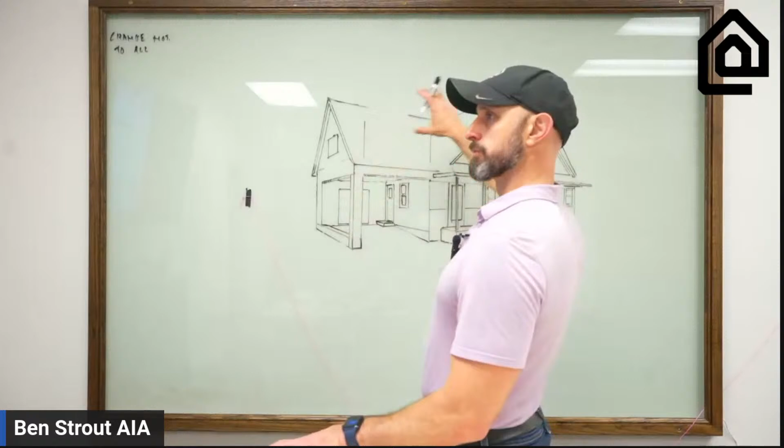Design for a house here in Alabama. Right now the house as it sits is a single story house. So this part is existing, and we're adding basically this roof structure, some windows, some gables, some dormers.

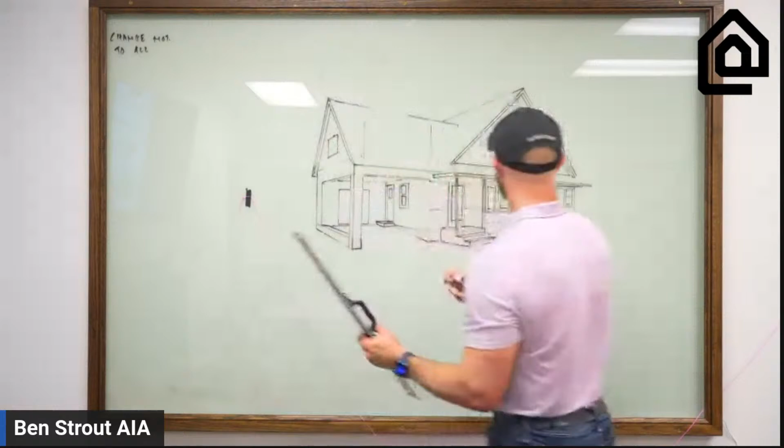Awesome, thank you, man, I appreciate it. Yeah, we have a lot of fun doing what we get to do. And I am going to do some kind of perspective drawings.

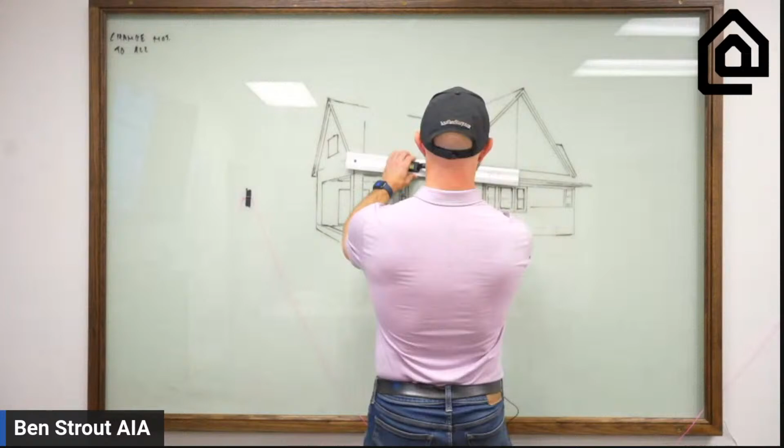Let's go, Edmonton, go. There you go. We got a little bet going in the background here. I don't even know who's playing. I grew up in the Northeast and had buddies that played hockey, and it hurt too bad. I played a couple times, and yeah, when you get hit, it just hurts. I'm just like, no, I don't want to do that. So yeah, hockey's a no for me, but I love how brave you have to be and tough. So more power to that, if you can handle it.

But okay, so again, my name is Ben Strout, I'm an architect. And well, actually, I started my life in construction. Why were carports built over garages? Why did they do that instead? I don't know, it pretty much could be a garage if you put a door on it. But I think cost, this was probably a pretty inexpensive build when it was built.

And it's funny because now it's like a 900 square foot house in a nice neighborhood. And that's actually one of the things that's so cool about the Another Story system, is that when you're working with a smaller footprint house, this really is a leverage point, especially if you're in a nicer neighborhood where you're able to.

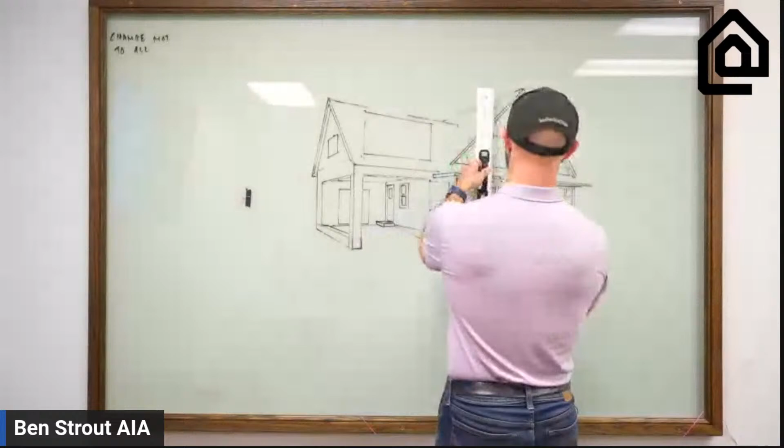Had it at the ready. Thank you, yep, Jeremy's my backup, he's my wingman. Are you going to pop in tonight? No, I need to stay in the background tonight, I'm bouncing between Joyce, bouncing up and down between naps. Gotcha, cool, no, that's great.

But yeah, so we're designing, and we've got some likes, some loves. If you have any questions about what we're doing, don't hesitate to jump in here.

What I would like to highlight about what I'm drawing and what we're doing, probably the most important thing, is the fact that our system, we have a proprietary system called the Another Story system, which enables you to add a second story.

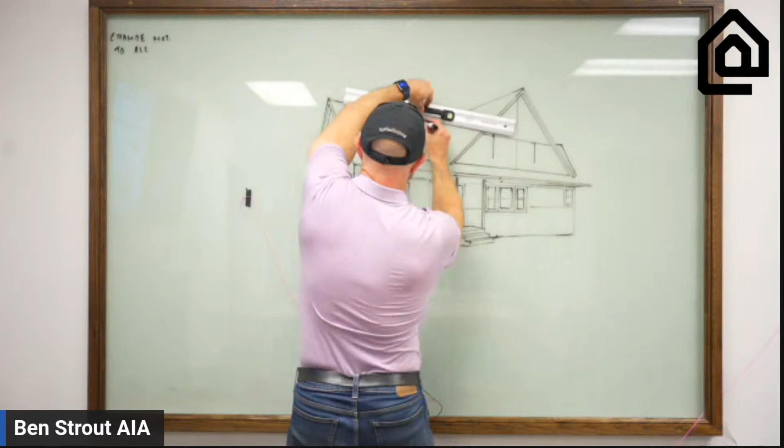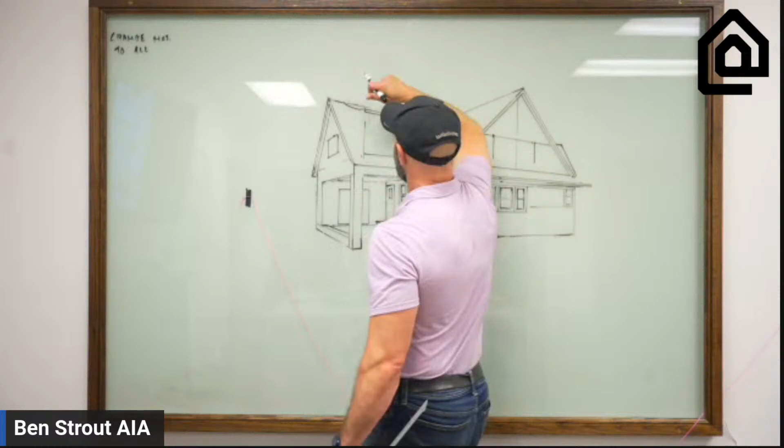Enables you to add a second story on your home while you live there, not displacing you, and keeps your house safe during the construction. A lot of people have considered adding additional space to their home. That would be great. But you've probably heard horror stories of people adding a second story, with water getting in or other damage to the main level that came from the process.

Can you do it on a trailer? No, not really. Would it be safe to assume the system would allow you to add a third story? No, it's not safe to assume. It can happen, but the problem with the third story isn't so much structural issues as it is zoning and city issues. It depends on where you are. Most of the time the city doesn't like buildings that get that tall, so that's a non-starter a lot of times. But we would love to still take a look at it.

Some of the workarounds for that is to do more like a story and a half, so you can still pop up the second story and then use the area underneath the new roof that you've made.

Can you add a story to a modular home? Yes, depends on the construction. We work all over the place. Our office is in Alabama, but we have contractors in Boston, in Florida, and in Utah, and we're adding more of them all the time.

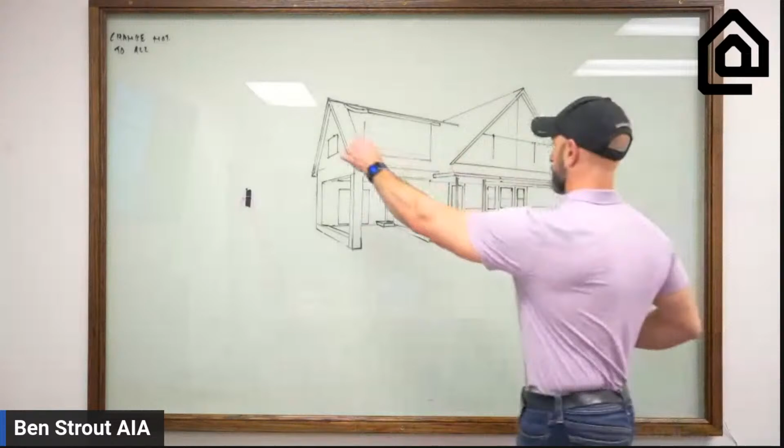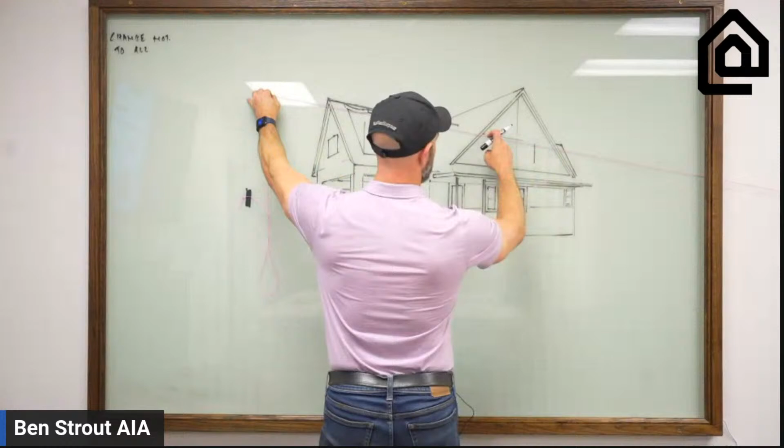So again, I'm Ben Strout, and why should you care what I have to say about adding space to your home? I'll tell you why: because I've done it the wrong way, several times. And once you see that you don't have to do it the wrong way, and that there's a better way to go about it, you just want to tell everybody about it.

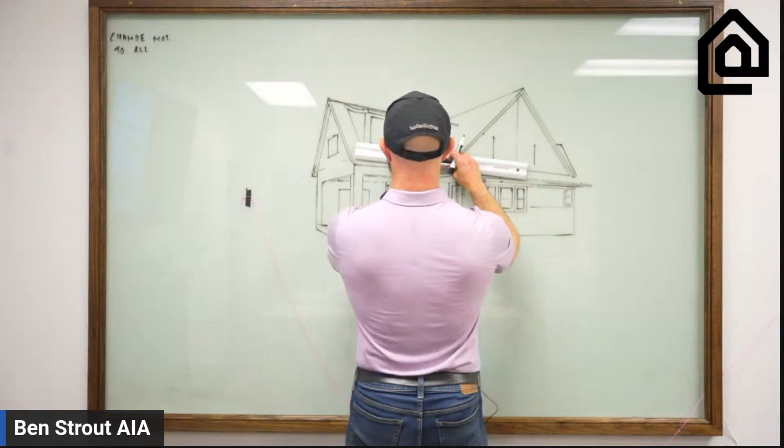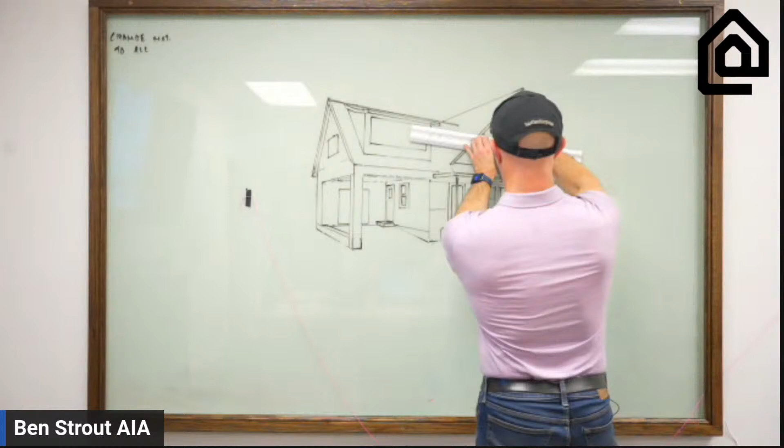Here's the deal: we get a lot of people who say, 'that doesn't work for me, I wanted a third story,' or 'I wanted to do it on a modular home and the construction isn't enough to hold it.' Well, guess what? You probably know somebody. If it's not you, it could be your cousin, your friend, your mom, your uncle, somebody that needs more space. And if they need more space and they're stuck because moving out isn't feasible, we can help them think about modular, as we have.

We'll always flush things out, and that's honestly... So Jeremy is one of the guys working with me, he's one of my business partners. I didn't realize he was commenting. Can you hear me? Yes, I can hear you now. No, I was saying flush out things, not flush things. We are, whoops, flesh. Yeah, okay, flush things out. Yeah, you can flush things too, like down the toilet. Now, I've flushed some of my designs for sure.

I think, what are you, a Zennial, or what's your generation? I don't know. '92. I feel like I'm 92. Oh yeah, so I don't know what you are. But anyways, they have different language in your generation that I don't always understand. Flushing it out, I said flush it out is what I meant. You said flesh it out. Let's make that very clear. You like to flush it out or flesh it out? Either way, you know what I mean, both ways. You get the point, I get the point.

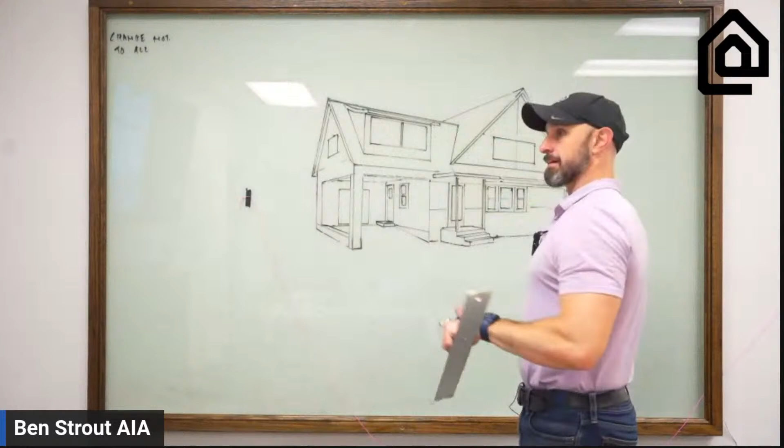I love it. Okay, so again, I feel redundant when I'm on here, but I feel like it's the best thing so that people can understand what it is that I'm talking about. We have invented a way to do this to your home.

If you live in a single-story home, in a nice neighborhood where the values of your home are great, and you wish you had more space but you're stuck because your house is too small, we can add a second story on your home while you live there. We'd love to do that for you.

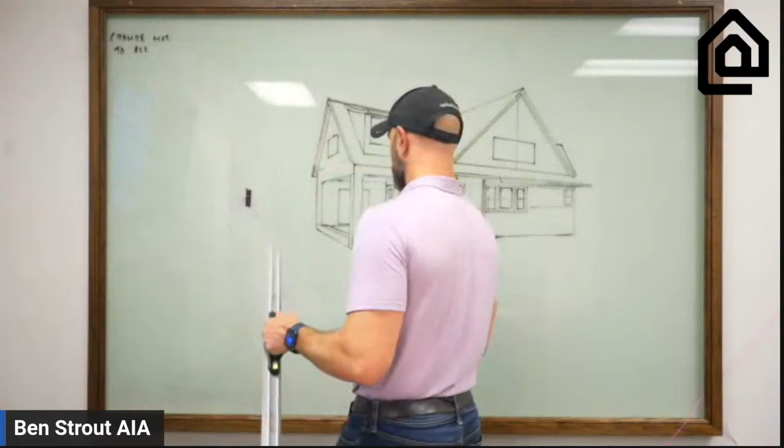I love these modular questions, man. These are freaking sweet. Yeah, no, this is great. I thought this would be a good time to come on here, I'm like, everybody's just kind of hanging out. Yeah, evening times are always the best, especially Sunday nights because everyone's great.

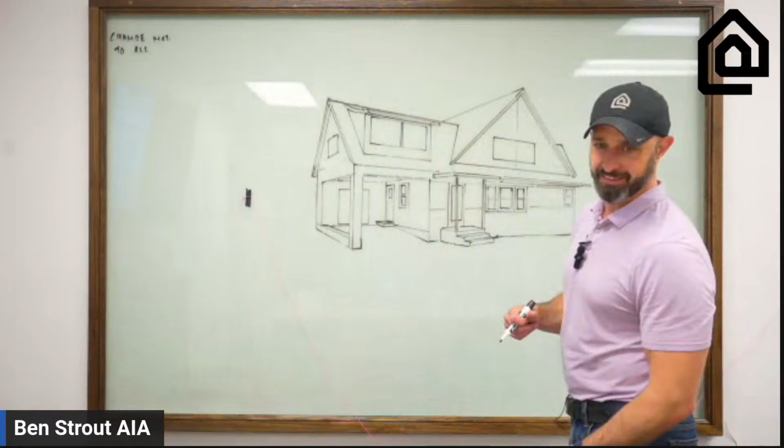Hey, Dopamine Designer, how you doing? Woohoo, what's going on? That's Natalia, right? That's awesome.

So I'm thinking with this one, we're actually going to do a little front porch across the front. I'm going to add some zhuzh to it, a little bit of character.

How did your move go, Natalia? Did you get moved? I saw where you were washing some carpets or something, looked like it was satisfying to get all the dirt out. I hate moving. Yes, do it, recommend it to her, keep recommending away. I love it, thank you so much for liking the movement. Well good, great. The last time I did a move, I was like, if I don't have to do this again, that'd be okay. I don't love moving.

So I take a conventional frame, so I take it you're going to conventional frame the roof. It is kind of like conventional frame. So we basically frame it backwards from what's typically done, in that we build the shell, the whole exterior shell, before we take the old roof off. And that keeps the house from...

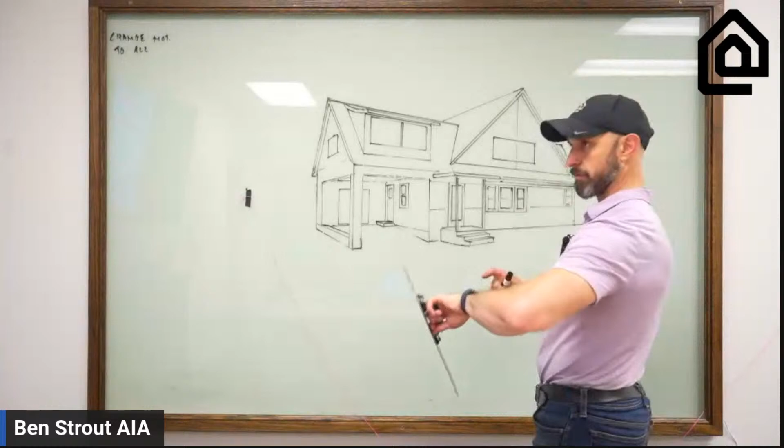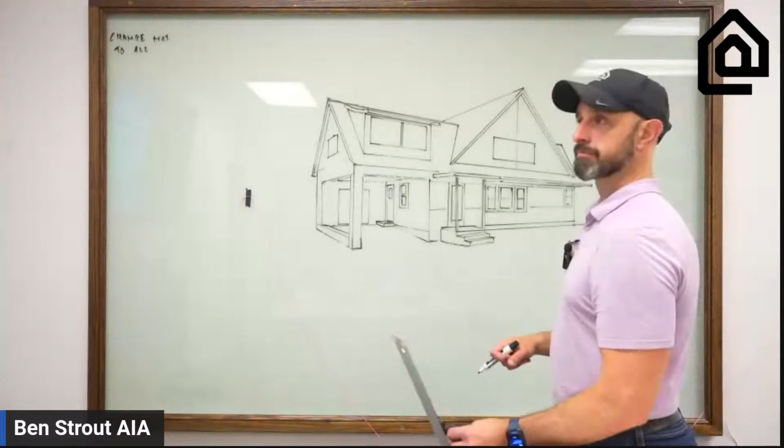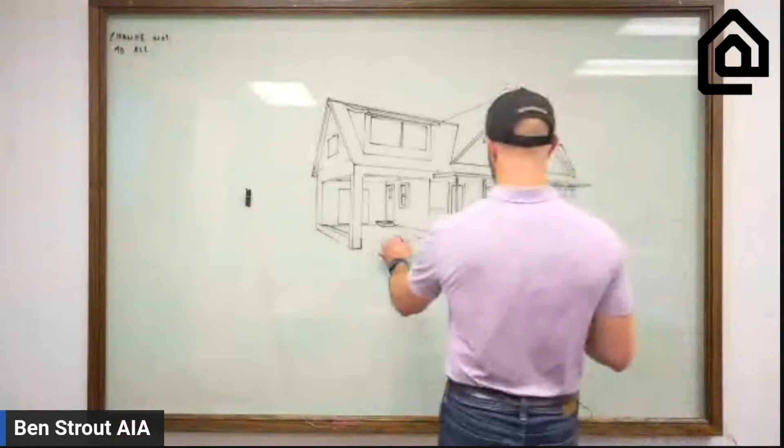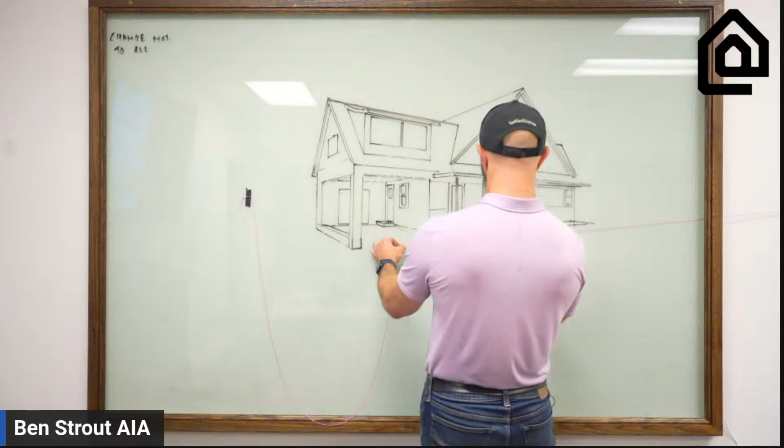So yeah, we're designing a second story on this home, and this home is in Alabama. The way we're going to do this one is actually like a shell out. The homeowner is fairly handy and he wants to build out the interior himself, so we'll be doing the shell for this one.

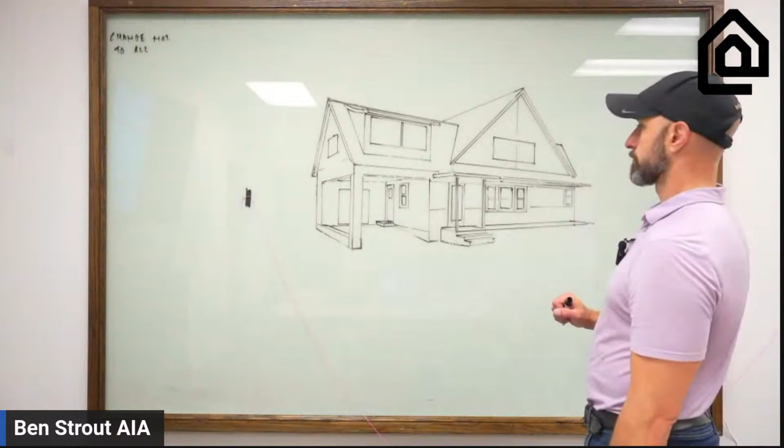Giving him the bones to be able to come back and infill the interior. So basically you're going to have a soffit over the carport. This is actually kind of poking out, it looks like it's not got a soffit, but it's sticking out. It just happens to be lining up.

You hear me? What's that? I said of all things to point out. No, I mean, it's a fine detail. But no man, dude, I'm telling you, here they come.

I need my room in a split level. We turned a 3-bedroom, 1-bath into a 6-bedroom, 2-bath without adding on. Oh cool, wow, that's crazy. So, big one.

My angles of depth are off. Yeah, they are a little bit. But it's a whiteboard sketch, and we're not going to build it. Yeah.

I swear, sometimes the comments are just the most entertaining. You're like, yeah, thanks genius, I appreciate that. No, I mean it's okay, it's fine. Oh guys, for those seeing this on other platforms, we have some troll comments happening over on TikTok.

Well, I mean, it's fine. Feedback is feedback. And I think also the way this thing looks on the screen is a little bit off too. But...

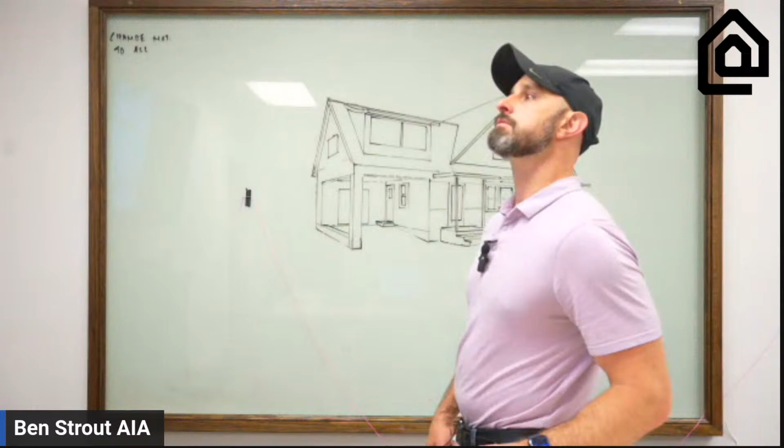Let's get more light on the gable ends. I can't tell what that means. Sabus, what does that mean? Mr. Bigelow, you should go live and show us what you can do.

Will a new second floor joist be needed? Yes. So we do a new floor system that sits above, with more glass. That could look good. We install a new floor system above the existing ceiling, so there's basically an air gap between the two. That way you don't have to touch any of the existing infrastructure. Windows or more character, yeah.

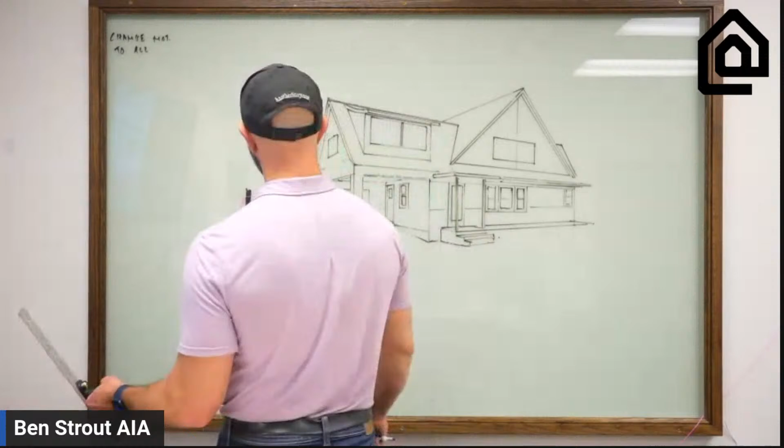How long does the process take on average? So the design part, Natalia, it ranges - it's a pretty broad range, but it'll range from 2 months to 5 months depending on the client. Really, we can get to a design pretty quick, but clients oftentimes go back and forth and have to see things 13 different ways.

I work for Truss Joist. Do you spec? We absolutely spec. I spec all day long. Send me your information and we can chat.

I don't know what Chester Copperpot means. Oh, Chester Copperpot, that was such a good movie. Did you get that reference? That's from the Goonies, Chester Copperpot. That was one of my favorites when I was a kid. Very nostalgic.

I think that pulled that line down. That's what's messing us up a little bit.

Okay, what's behind the back wall covered entryway? So this is a little carport that's on here. I'm thinking we might suggest that we wind up doing - it's a garage and we might close it in. I don't know yet.

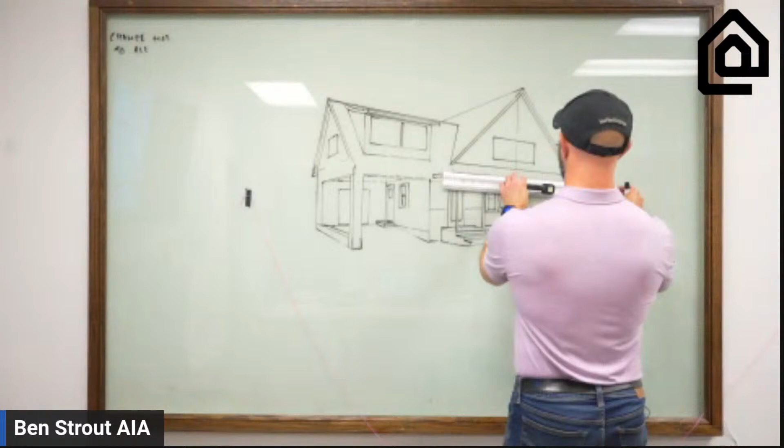I don't know how many of you do this kind of live stuff - you realize you do these little weird vocal tics. It drives me crazy when I listen back to myself. I have this thing where I hold my breath in between things I say. I'm like, why do I keep doing that? It's driving me insane, it's like a muffler sputtering. Oh, it's so annoying, I'm so annoying.

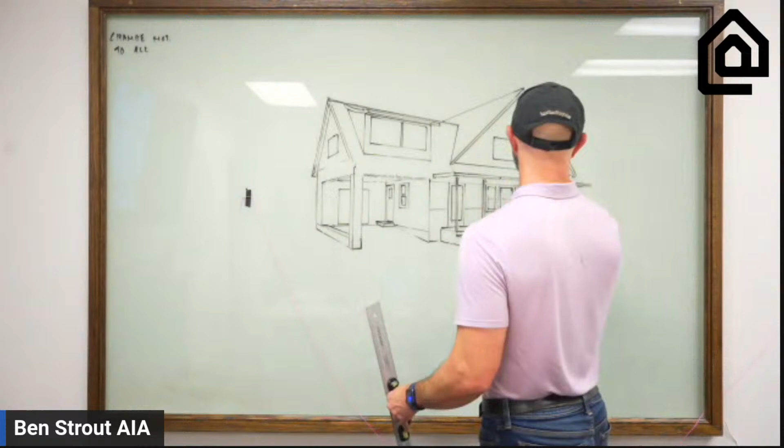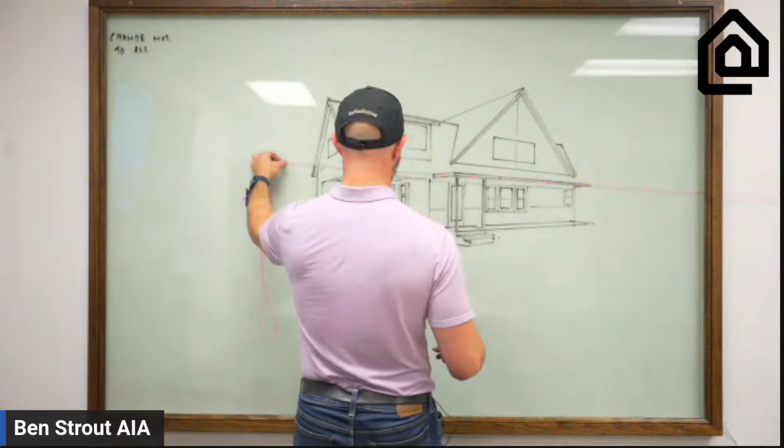Oh man, that's all good, dude. I say too much - well, it's normal, but the little grunts, I'm like, what am I grunting at? Hey, I make old man noises when I sit up. I just don't know that I'm holding my breath is what it is. I'll be like, oh yeah, I haven't taken a breath in a while, I should breathe - that's a good thing to do, if you're into that kind of thing. Yeah, it's important a little bit. It does have value, there's some value to it.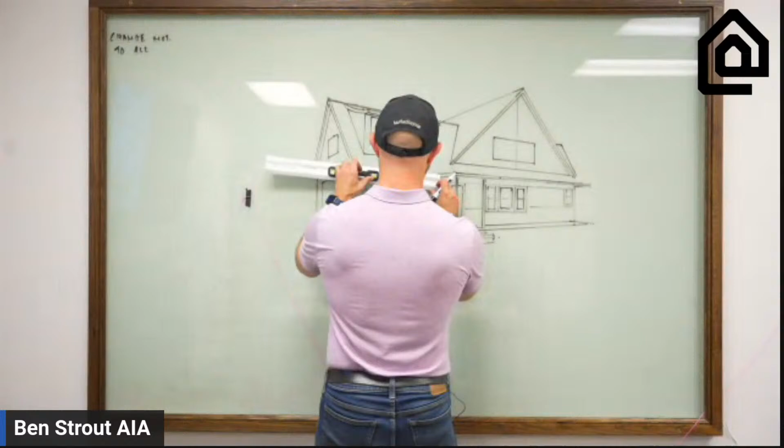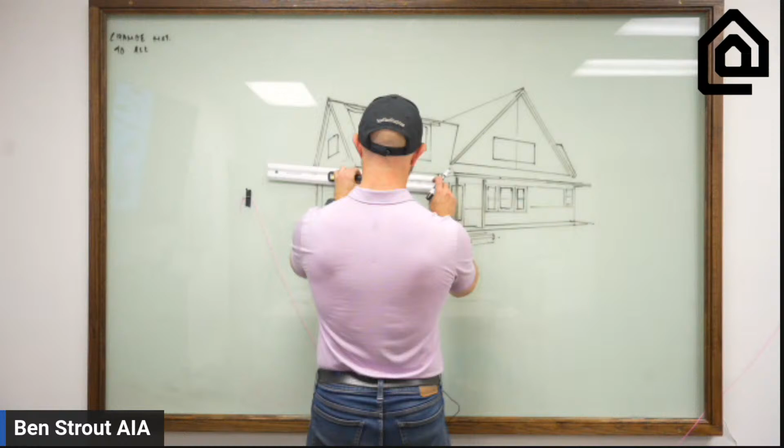Okay, so back to what it is we do and why we do it. Again, my name is Ben Strout. Why should you care what I have to say or what I'm drawing or what we are doing? I happen to be an architect, a contractor, a home builder and GC, and started my life as a carpenter. Really, at the heart and soul of who I am, I'm an inventor. And so we invented a way to add a second story on your home without you having to move out. And that's what you're watching me do right now.

These are just some sketches. This is not at all to scale, really - not at all. I mean, it's kind of to scale. This is not really true to form of what this is going to be. This is really for me to have fun talking.

Ants? What's that? What is this? A center for ants? Center for ants. This is 100% a center for ants.

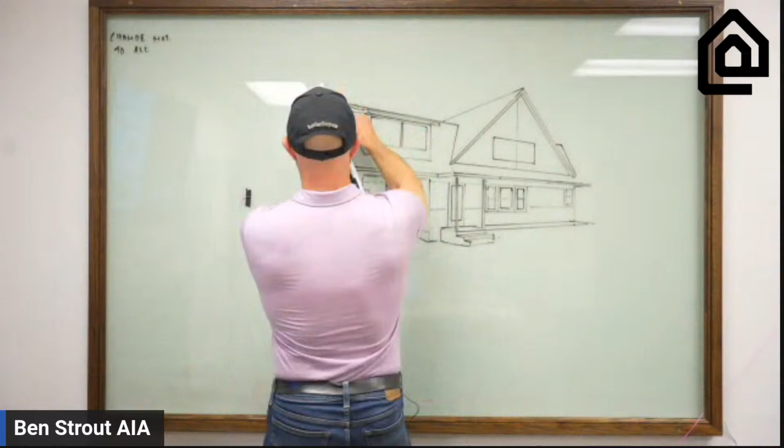Yeah, we couldn't fit more than 1 or 2 kids in there total. But so yeah, we invented a way to add a second story on your home while you live there without displacing you or your family. Maybe this isn't for you, maybe you don't need a second story, but I bet you know somebody who does.

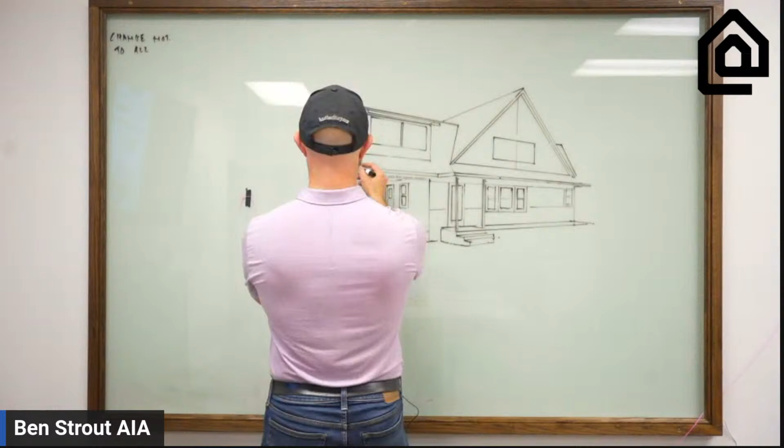And I bet you'd be their hero if you called them and said, hey, you know how you guys are on top of each other and you're probably going to murder one of your children? Oh, I can't say that. Probably going to, yes.

Exactly, sister ceiling joist. That's exactly what we do. Well, no, so we will sometimes sister to trusses, but ceiling joists usually no. We sit up above the ceiling joist so that we don't touch any of the existing infrastructure and don't have to mess with it. Otherwise, you lose a lot of the actual space.

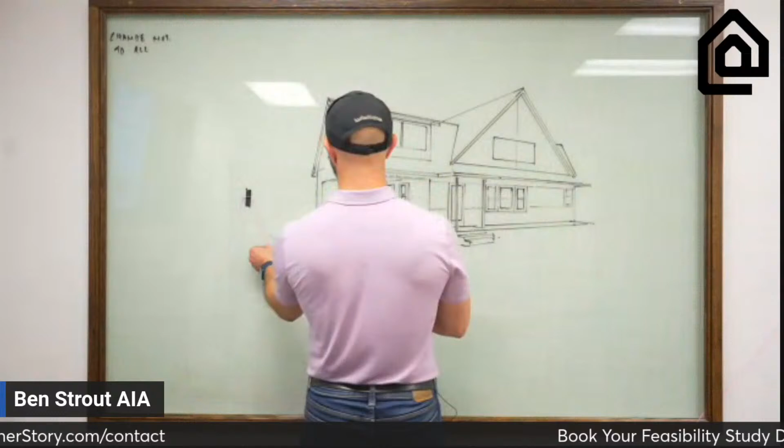That's the trick, that's the question. Chester Copperpot's hitting on something big. That's the trick. So, little backstory: we did it the wrong way the first time.

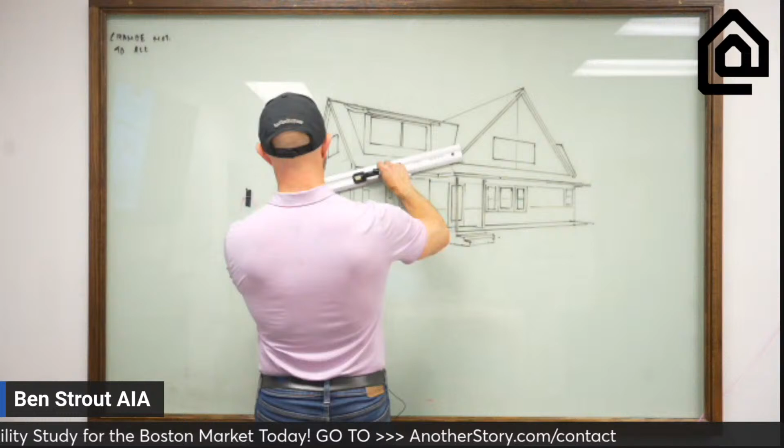So in 2012, what feels like another lifetime ago, we took the roof off of a house, tried to frame it back as fast as possible, and lost everything on the main level of the house. It wound up costing us right about $100,000 to fix the mess up, and that was 2012 money—all I had at the time and then some. We did get reimbursed from insurance eventually, but it was not enough to have saved our company. We wound up having to do all of that out of pocket, and it sucked. I would never recommend that.

Yeah, exactly, this mama needs space, I'm telling you.

Okay, so we've done some really cool designs around split level designs. I've got a couple in my pocket, I've drawn them a couple times. No one has moved forward with one yet, so you could be our first. Go into the link in the bio and sign up for a free consultation—we'd love to talk to you about your house.

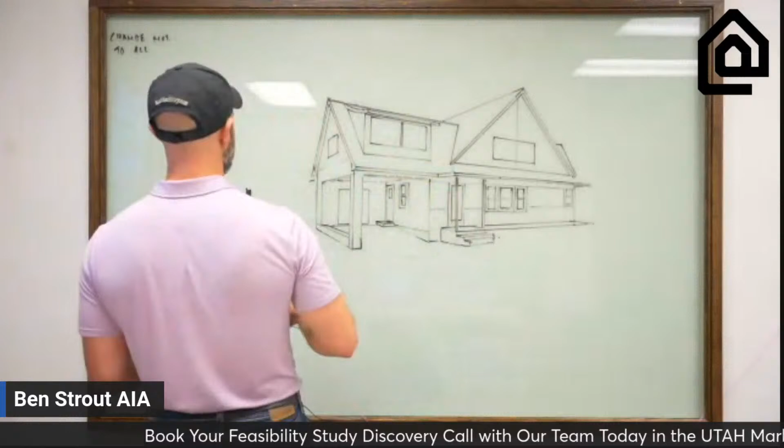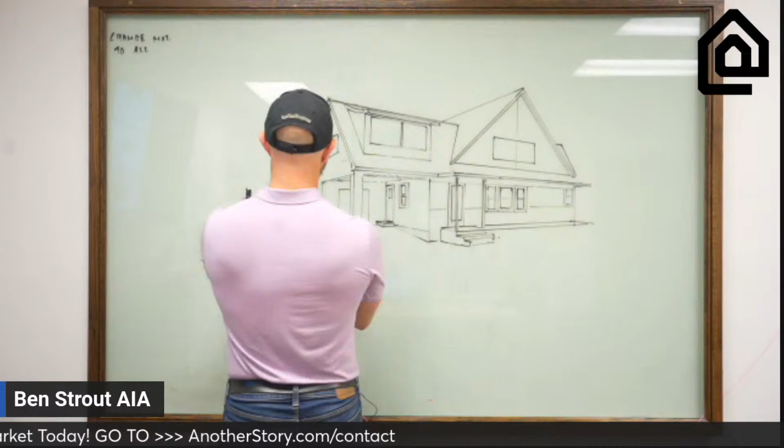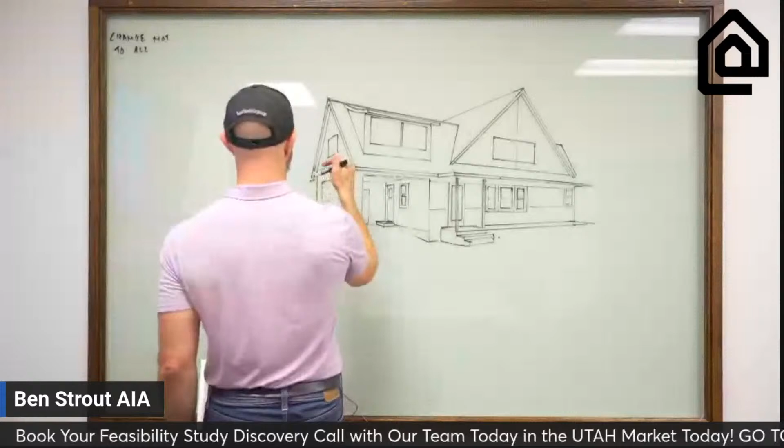Okay, so in 2012, we took the roof off of the house and lost everything in the house. That was awful, I said I'd never do it again. Then somebody asked me, would you do it again? I was like, nah, I don't want to, but if I was going to, how would I do it? That failure was the seed of everything we're doing now, which is we build the entire shell of the second story over the existing roof before we remove the existing roof. So there's never a day when your house doesn't have a roof on it, because that's the trick.

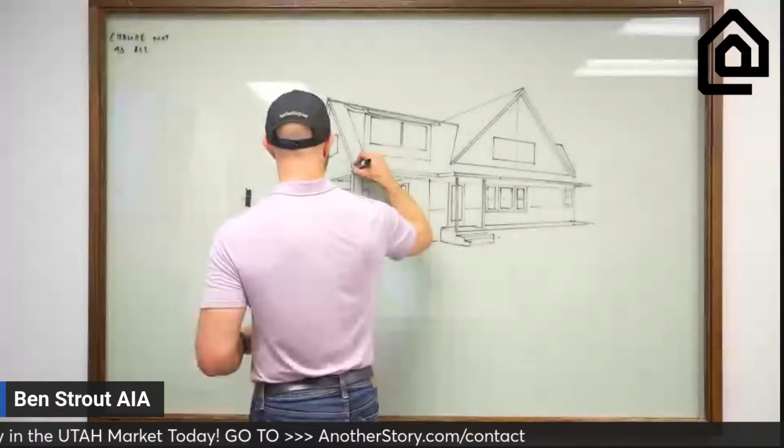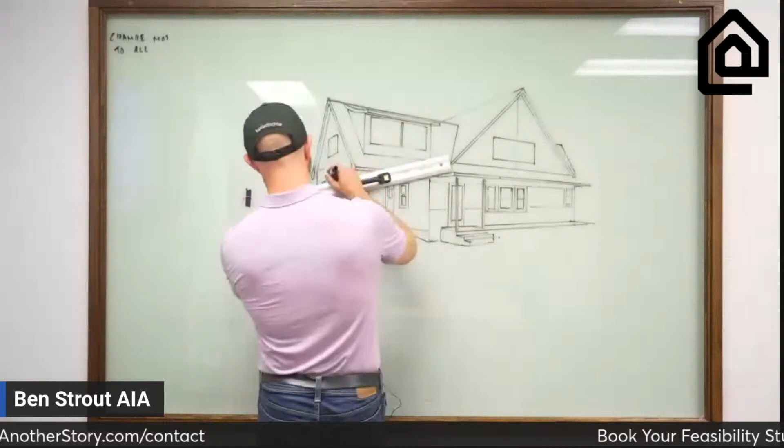We found there's a bunch of other really cool efficiencies when you do it that way. One of the comments that came across tonight is really telling—the goal when you're doing a typical second story addition is people think they'll save money if they sister the side of their existing ceiling joists or beef them up to use as the floor system for the new second story. It is a fool's errand to try to do that.

More people here than just you. I don't know what that means. Yeah, buddy. I have no idea either.

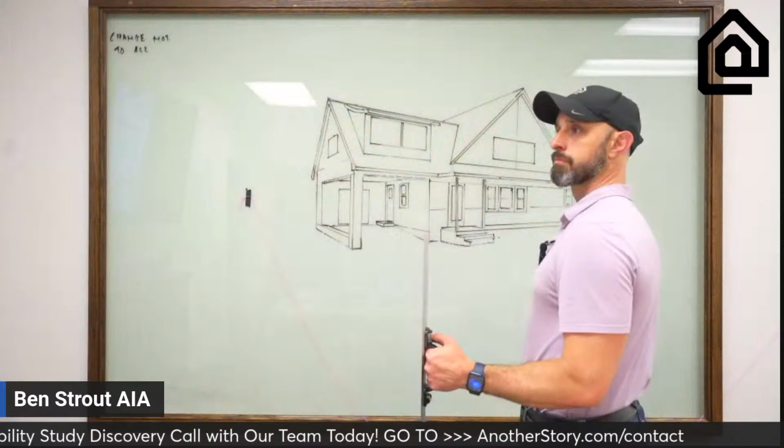Oh, okay, yeah. By accepting the fact that you're going to have to add a new floor system in there—thanks man, thanks Kurt, I appreciate it.

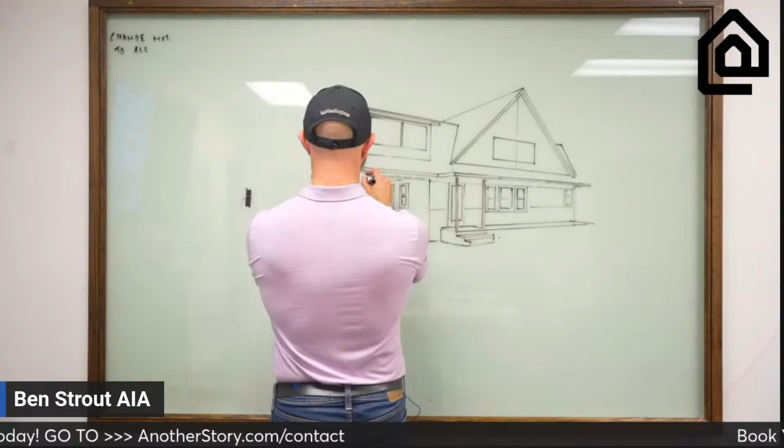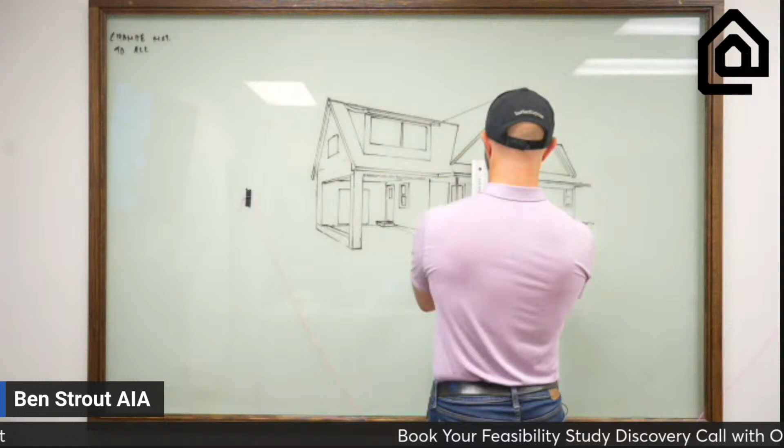So yeah, we're just doing a whiteboard sketch. The way I'm doing it to make it feel somewhat real is I had an image cast up here underneath this, and then I put string lines on here to get the angles correct, and then use the string lines to set my lines and get a good, true, parallel perspective drawing.

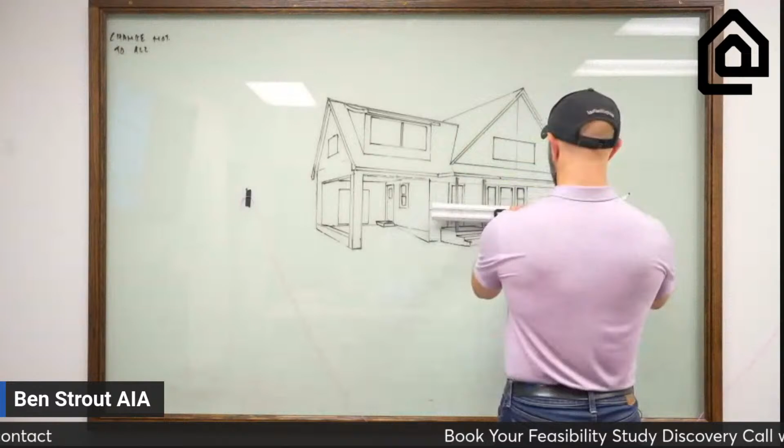So that's how I do it. I've seen other people do it—actually I'm not original here at all. There's another guy who does this with strings, somewhere in South America, and he does some really cool drawings. I'd love to spend time learning from him directly. I just watch him sometimes and think, oh, that's a cool way to do that. So I tried it my own way.

Needs a bigger front porch. Yeah, we're actually doing that right now—this is going to go all the way across here, just like a stoop kind of front porch.

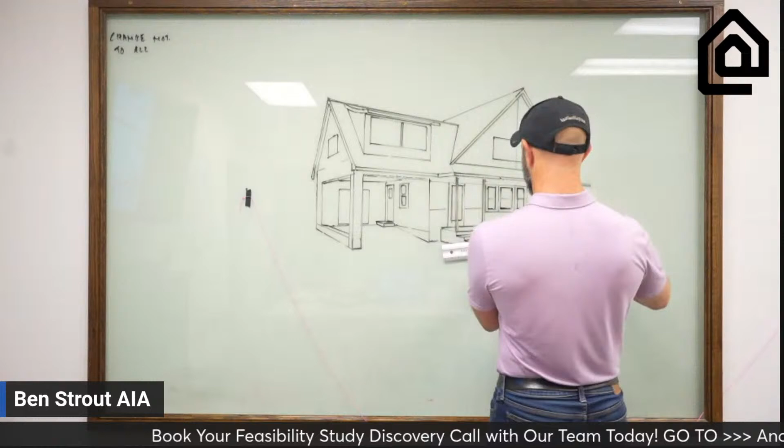But yeah, this house—I go off on all these tangents because people ask questions, and I'm like, did I finish talking about that? No, I didn't. So this house is in a really cute neighborhood, and it's one of the smaller houses in the neighborhood, about 900 square feet, while other houses in the neighborhood go for $1 million plus.

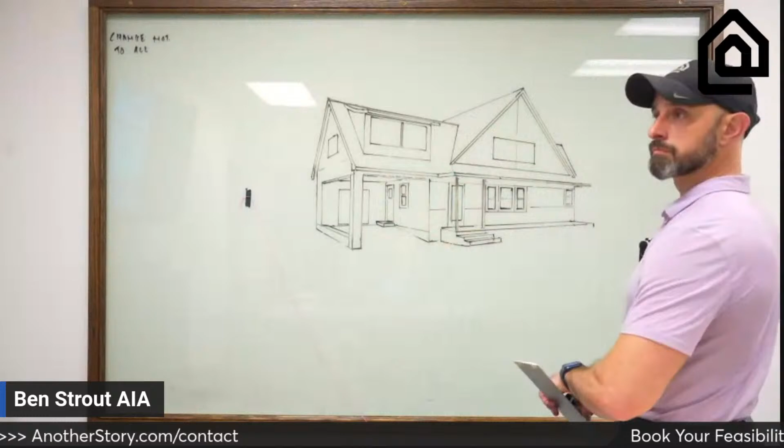Yeah, one step at a time. So yeah,

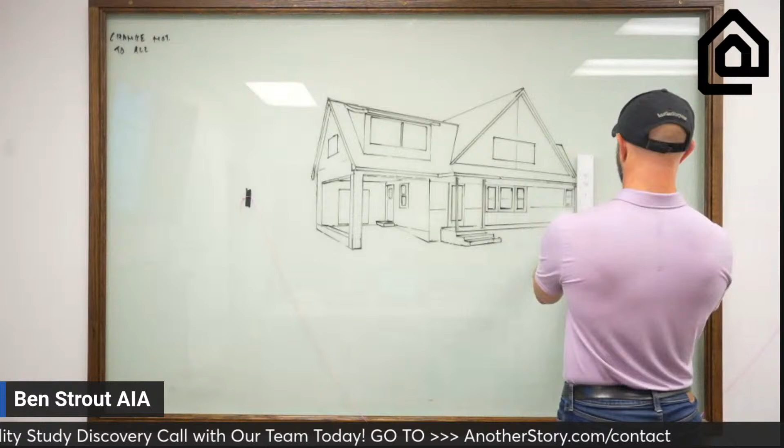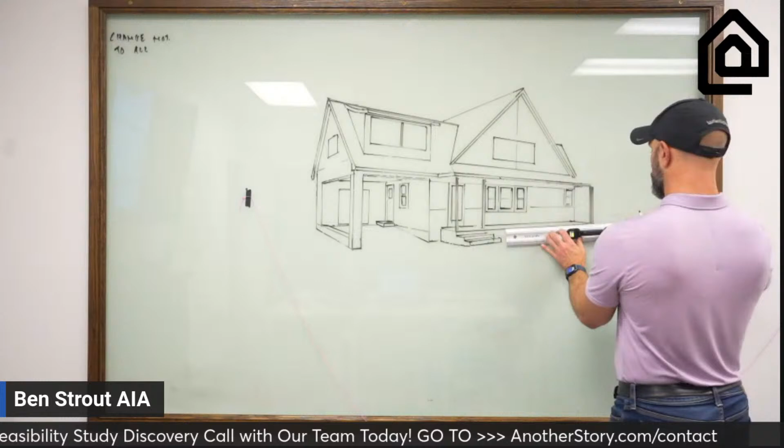The trick with this, it's kind of like the old adage, buy the worst house in the best neighborhood, and that's what this guy has got. Right now he's sitting on a great little spot. The neat thing is, when you can buy a house in the same neighborhood for a million dollars, this house has a lot of room to add space without outdoing the market. So that's what I advise people on when they're thinking about doing this kind of stuff: does your home carry the final value needed to warrant doing this kind of work?

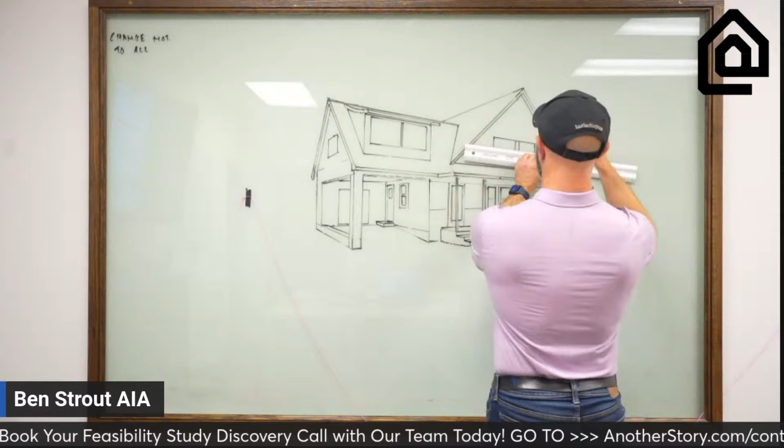And if it does, it makes it really easy to have the conversation with the bank, and really easy to have the conversation with your husband or your wife.

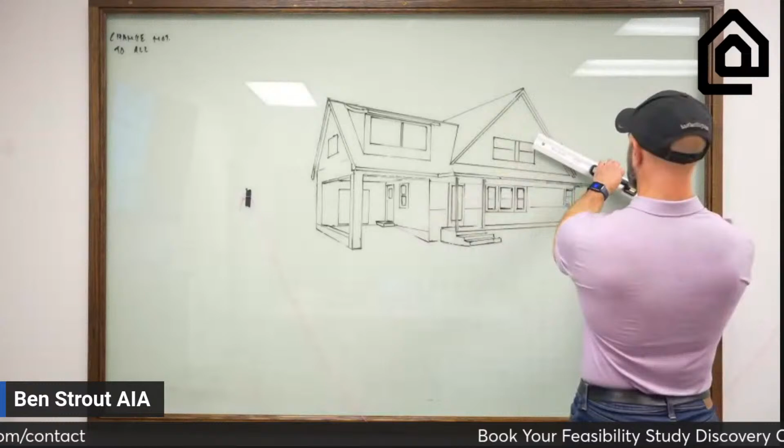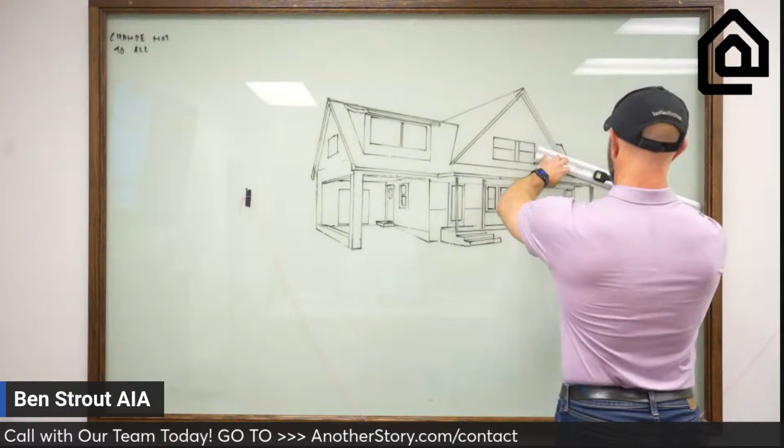That inside corner needs a valley. This roof plane is coming across, and there's a little swoopy roof coming out. So this still needs a hip out to here. The hips and valleys are the trickiest for me on these, because there's not a great way to get them accurate, if that makes sense.

But I really appreciate you guys coming and hanging out with me tonight. I can't believe how many people have been here.

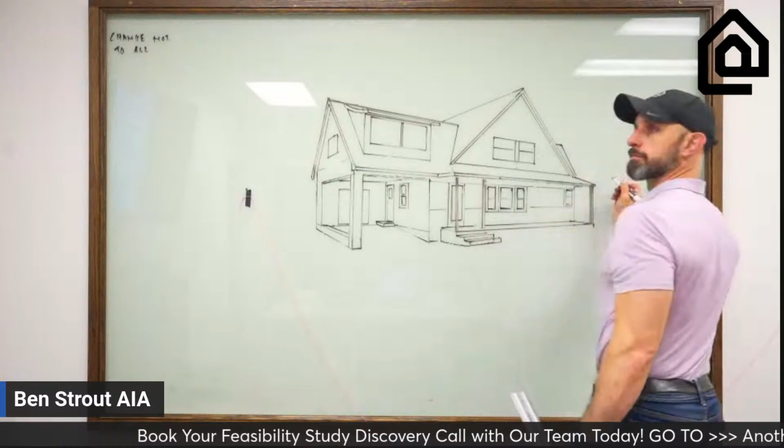They don't line up, but it looks good. That might not be right. Maybe it needs to go up a little higher, you think? It's hard to tell the pitch again, when you have two abstract pitches coming together. This is like a lower pitch roof here, probably a 12 on 12. This is probably a 14 and 12. But again, we're just kind of riffing here. Does that look better? Does that help?

Carport is from the 1960s.

No, back to where it was. Yeah, I felt like it was kind of, maybe it needs to go more vertical. I think it should be somewhere in there emotionally. Again, I have a hard time. No, that ain't it. It's probably right there. That's actually one of the things I love about doing these whiteboard sketches, is that you can edit them so easily with just your finger. I think that registers correctly to me for some reason. I don't know, it's pretty close.

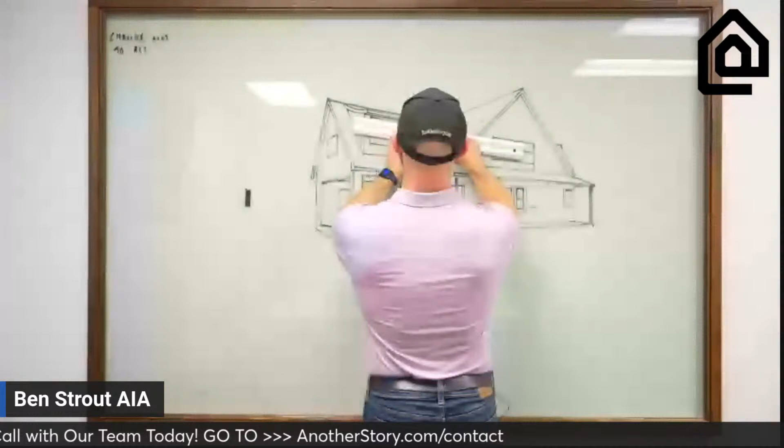He's doing great. I'm seeing the gable line and this line now, and it doesn't seem right. I mean, for what I'm trying to do, it's going to get the point across. I'm going to do some studying and figure out how to do this more accurately, where those things align with each other. There's got to be a way to do it. I just don't know how yet, and that's okay, we all have room to grow.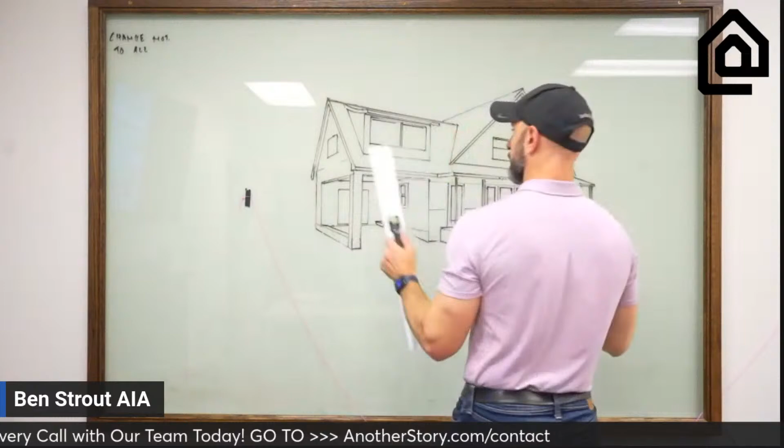So again, my name is Ben. I'm an architect, I'm a carpenter. I started as a carpenter, and we have invented a way to add a second story on your home without you having to move out. I love it, and I love that I get to help people who need more space, busting at the seams, and don't have a good way to do it.

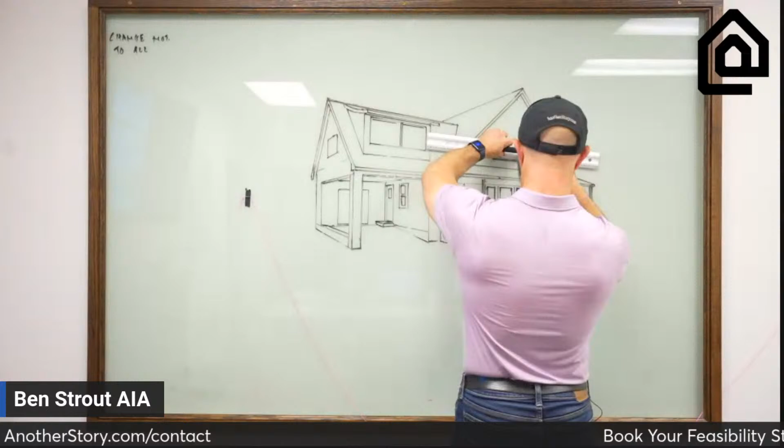So there are so many people who would add more space or would be in a bigger house, find a better place to live, except it's just either too expensive to move or they can't move because of...

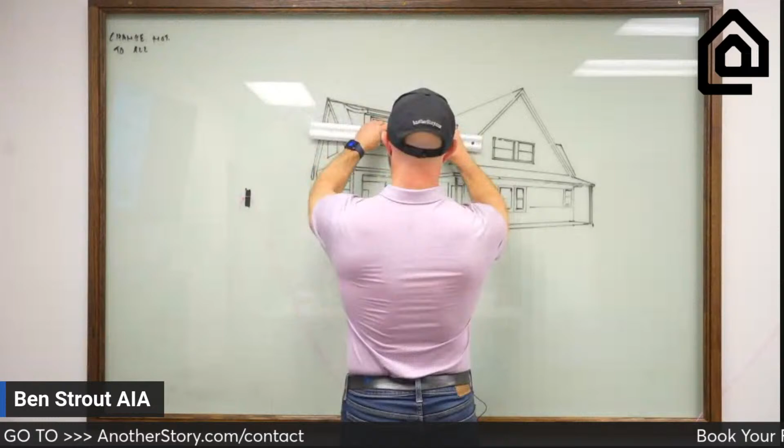This process can be so transformative for a lot of people. We really want to help as many people with it as possible. So if you know somebody, you could tell them about what we're doing and potentially help somebody dramatically add the space they need to their home while they live there. We can help them visualize it. This sketch is really one of the first steps in the process.

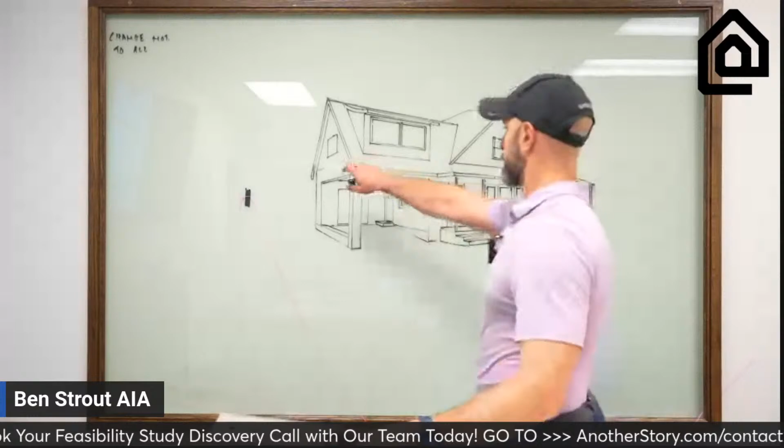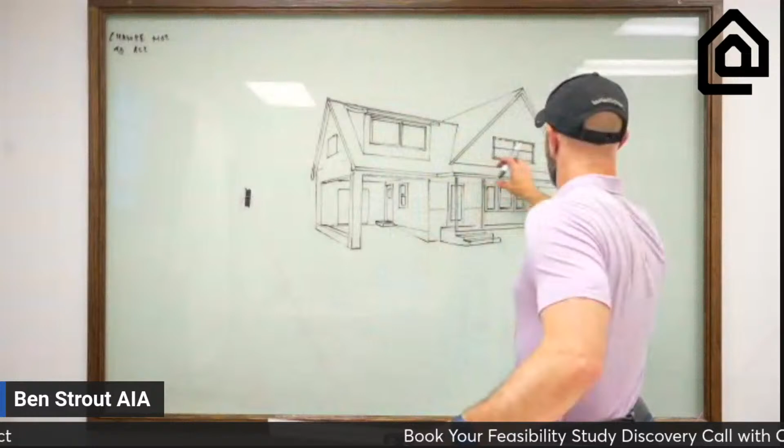And we wind up doing these types of sketches so that we can communicate with the drafting team. So the base of the house—basically if you draw a line right there, all of this is existing—and everything we're doing on top is the new stuff. We're going to do this little porch on the front as well.

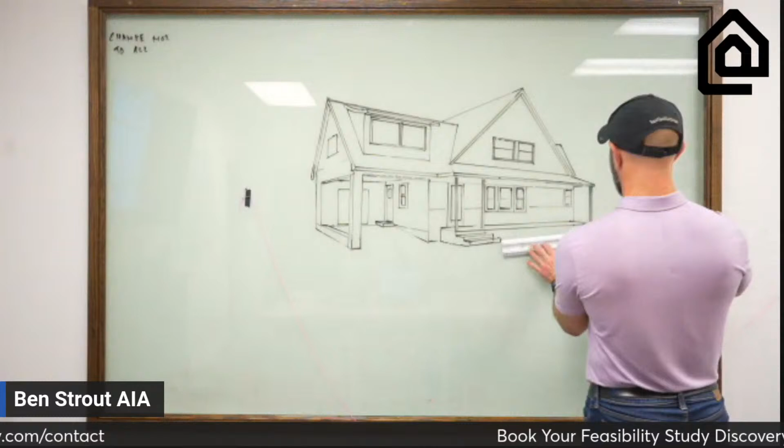So yeah, this is a cute little house, about 900 square feet, and we'll be adding more than the square footage of the house on top of it. So we'll wind up more than doubling this house when it's done. And what's really cool is that because of where it is and the neighborhood it's in, the appraisal on this type of work is above the cost of construction, which is very rare.

No, this is an existing carport. I wouldn't do it, I don't do carports. So your company does all the things start to finish? No, we have contractors all over the place.

Obviously the convenience of this is nuts, but how much does it honestly cost? The cost of construction on what we're doing is right around the same cost as you'd pay for new construction in your market. So it varies dramatically. We're looking at some in the Bay Area, and that's very expensive. Looking at one in Pebble Beach, also very expensive. But we're looking at some in Southern Alabama that aren't that bad. New construction in Lower Alabama is not that bad. So it really depends on cost of materials, cost of labor, all the different things that go into the actual cost of construction.

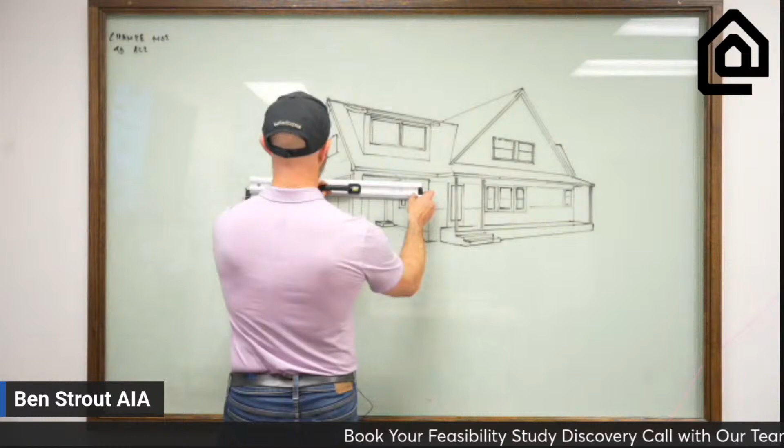So I'm probably going to call it here in a second, because that's a good version, and I can communicate that to the design team. I'll do another version tomorrow, and maybe...

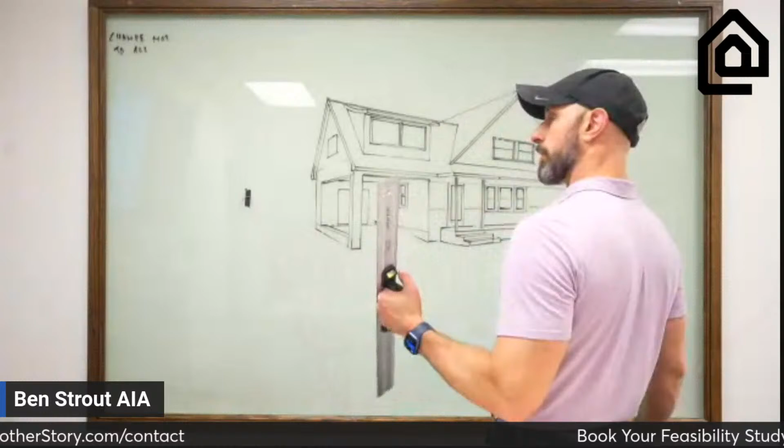Built into a bungalow, what are we looking at? Where's your house, Jacob? Mind divulging that live? Are you in an expensive area? So that's exactly what we're talking about here. This house is a 900 square foot house, and we're actually going to wind up putting back about 1,000, about 1,100 square feet when we're all done.

Well, I deal with portfolios in Detroit. So Detroit is kind of weird because there's some areas where the cost of construction and things can work out, but it's a little bit of an upside down market right now. There's not a lot of great labor up there from what I've tried to price out, and turning them into a bungalow won't get me much in return. I wouldn't probably push in that market as much, honestly, but we can definitely have the conversation.

What's that? Have him email me because I want to flesh out what he thinks is possible compared to what can be asset wise. He said he already works there, so he's already got a working model. So I want to flesh out what he's doing currently versus what he wants to do. Just have him email me on that, in the comments.

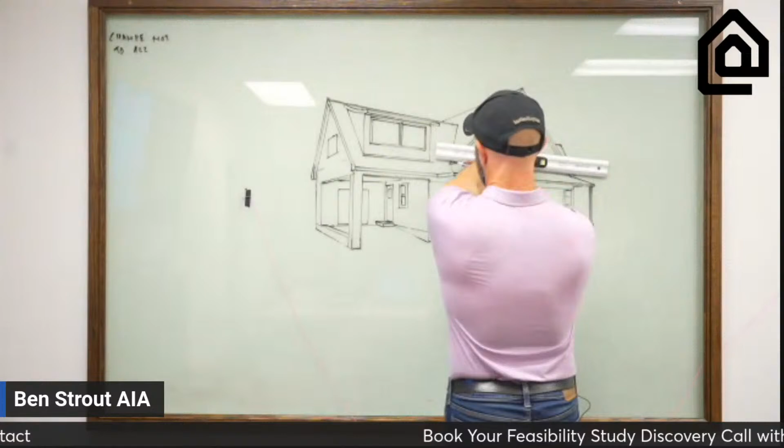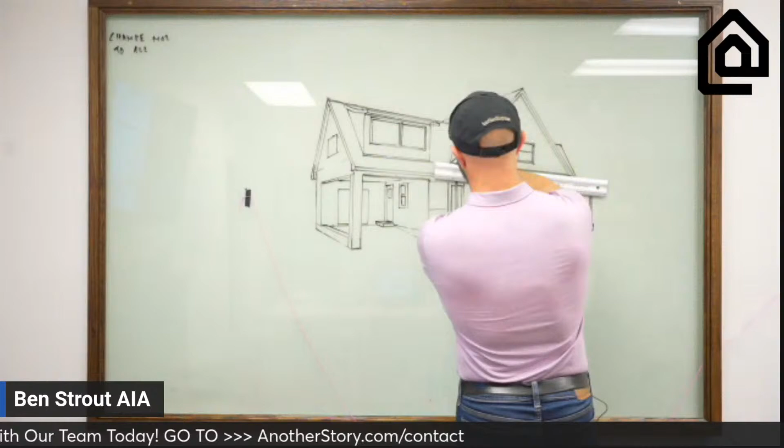So we've got a bunch of different ways to help your process, not just the Another Story system. The Another Story system is great. I don't know if you're doing wholesale or what you're doing, but we also have a modular system we're working with that's able to maximize dirt value if you're just doing ground up stuff as well.